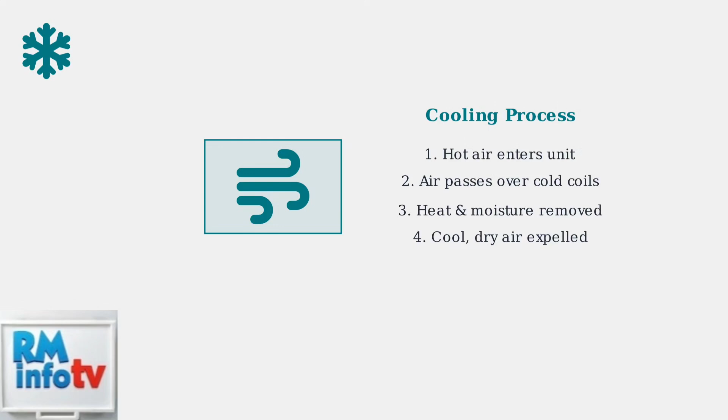DeLonghi portable air conditioners work by drawing hot air over refrigerant-cooled coils. This process removes both heat and moisture from the air, creating the cool, dry air that makes your room comfortable. The moisture that condenses during cooling must be managed properly.

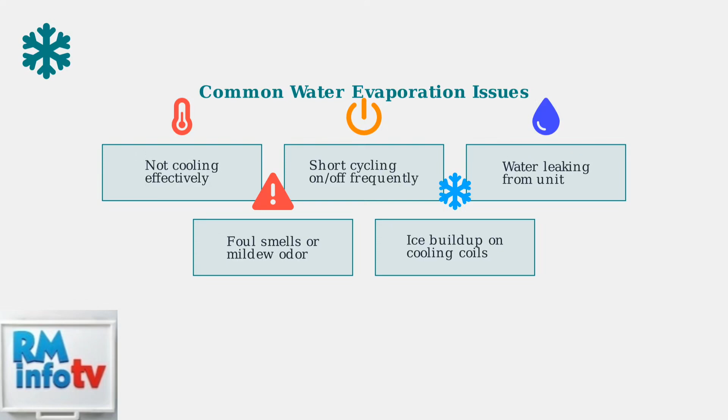DeLonghi units either evaporate this water automatically, drain it continuously through a hose, or collect it in an internal tank that requires manual emptying. Several common issues can affect water evaporation in DeLonghi portable air conditioners. These include poor cooling performance, short cycling where the unit turns on and off frequently, water leaks, unpleasant odors, and ice buildup on the coils.

High humidity is a major factor in water evaporation problems. When humidity levels exceed 60%, the unit produces more condensate than it can evaporate, potentially overwhelming the system. Ideal comfort occurs around 24 degrees Celsius with 50% relative humidity.

Proper setup is crucial for effective water evaporation. The unit must be placed on a level surface to ensure proper drainage, with sufficient clearance around all sides for adequate airflow. Regular maintenance, especially cleaning air filters, is essential for preventing water-related issues.

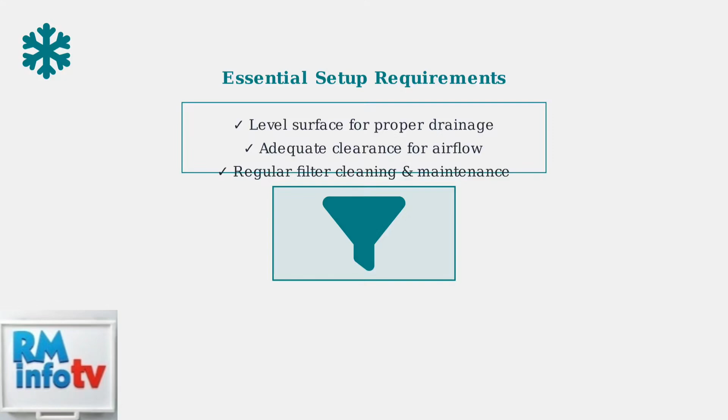Understanding these fundamentals helps identify when your DeLonghi portable air conditioner has water evaporation issues. In the next section, we'll cover specific troubleshooting steps to diagnose and fix these problems.

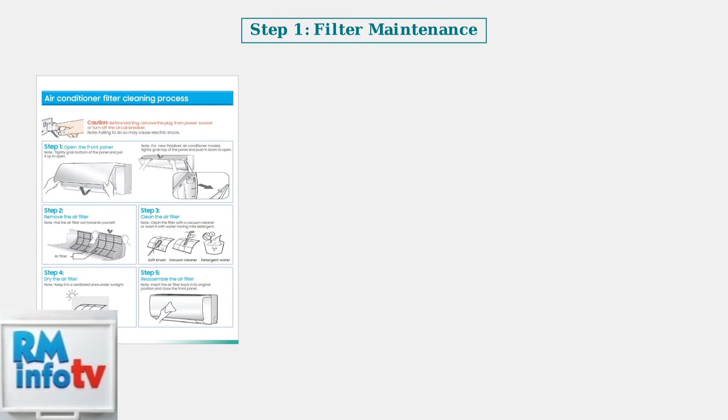The first step in troubleshooting drain system issues is inspecting and cleaning your air filters. Dirty filters restrict airflow and can cause ice buildup, leading to drainage problems. Remove the filter and clean it with a vacuum or wash it with soapy water. Make sure it's completely dry before reinstalling to prevent mold growth and ensure proper airflow.

Next, examine the drain plugs and hoses. Ensure drain plugs are securely in place when not using continuous drainage, and check the drain hose for clogs, kinks, or improper positioning. Check for common drain issues, including clogged hoses, loose connections, and improper hose positioning. These problems can cause water to back up and overflow from your unit.

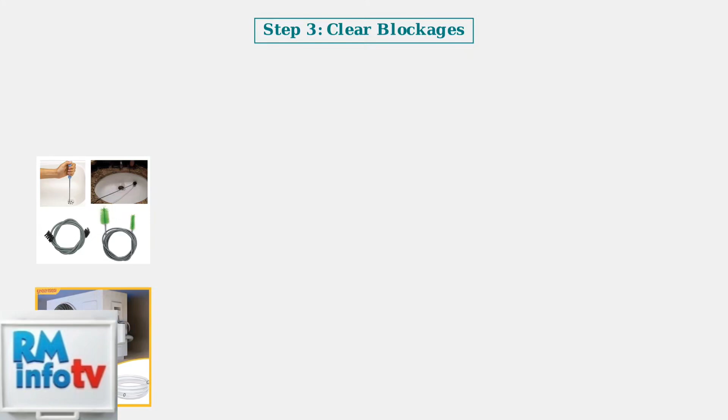To clear blockages, use a vacuum, brush, or soapy water to clean the drain hose. For internal drain lines, use compressed air or a thin brush to remove any obstructions. Use these tools and methods to effectively clear drain blockages. Always disconnect the unit from power before performing any maintenance work for safety.

At the end of each season, empty all water from the unit to prevent stagnation and bacterial growth. For complex issues like refrigerant leaks or compressor problems, consult a qualified HVAC technician. Regular maintenance prevents most drain system issues. However, some problems require professional expertise to resolve safely and effectively.